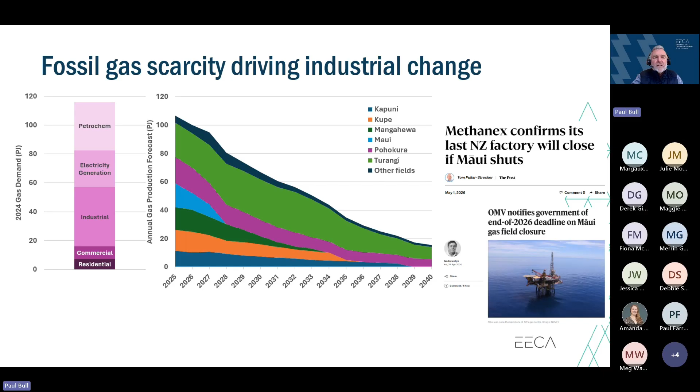What's driving that decline? This graph here represents the latest redetermination of gas, and so for the energy nerds amongst us, which maybe only myself and Paul today, or one or two others, the 2P reserves is the availability of the probability of gas coming out of the gas fields, and so 2P is that reserve which gives them the most comfort. And so you'll see significant decline over the years.

The orange is the Pohokura gas field, showing significant decline. Maui also on the decline. The redetermination says there's 738 petajoules of 2P reserve. Go back to the previous graph of 120 petajoules. So the more years we run at 120 petajoules means we're going to use that 738 up.

If we can get rid of that top portion, get to 60 petajoules, then 60 into the remaining does stretch it out. So if I crudely went, if you get rid of the 120-ish this year, left 60, that would mean you've got about 600 petajoules. So it's about 10 years supply.

A number of those will disappear, which is why that number looks at 20 petajoules being available in 2040. I could talk all day on gas, but I'm going to pass over to Meg to take us through the other challenges with energy.

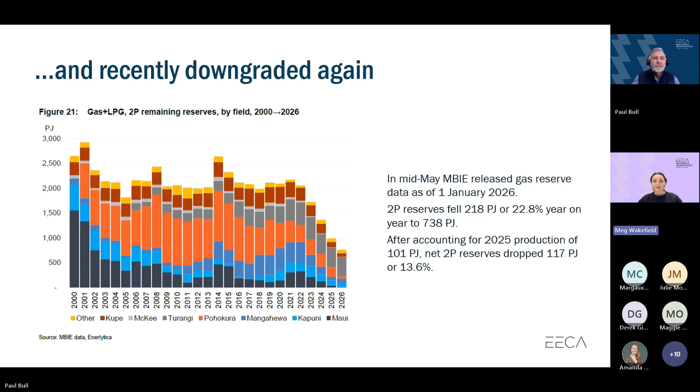Thanks, Paul, for running through what's happening with gas supply. There's definitely quite a lot of change happening in that space. There are also significant changes going on in the electricity sector at the same time.

Looking back to pre-1990, the paradigm then was a dispatch supply to meet demand approach. That was no longer the case for the last three decades. The network moved into more of an optimization approach. Obviously some new generation was built, but the focus was on optimizing and getting the most efficiency possible out of the existing infrastructure.

Looking forward to the era we're now in, post-2020, the paradigm has shifted again. We've entered an era of rapid and wide-reaching electrification of energy demand, and those previous two operating models just aren't suited to this. As a result, we're seeing another change in approach actively developing at the moment, basically flipping that pre-1990 narrative on its head. Rather than supply being dispatched to meet demand, we're now seeing a focus on dispatching demand to meet supply.

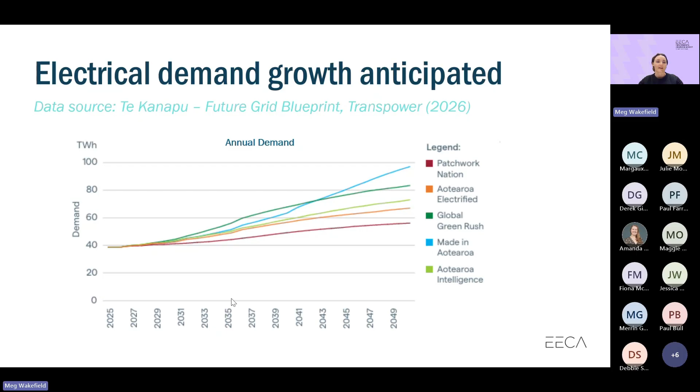Looking at the generation pipeline for New Zealand, there is quite a big upswing in expected generation deployment, and most of that is going to be in wind and solar. Along with that development of those wind and solar generation assets, it's expected that the marginal cost will be lower. However, renewables have lower capacity factors, which essentially means you still need some sort of cover in case they're not available when demand is there on the network.

That means fossil generation will still be required, but it's expected that it will mostly be required for dry year cover, as you will have heard about a lot in the media with everything going on with the LNG terminal.

With deployment of generation, of course, there are still risks. With more low-cost renewables, we do tend to see lower but also more variable wholesale pricing. If we end up in an excess of renewables, that might actually result in some projects being withdrawn from the construction pipeline.

Consenting holdups are always a thing as well, and there are always going to be construction bottlenecks and commissioning issues. Fast track consenting in particular doesn't necessarily always live up to its name. Any of these delays, whether in the deployment or decision-making phase, does tend to lead to cost increases, which will inevitably extend New Zealand's reliance on fossil generation.

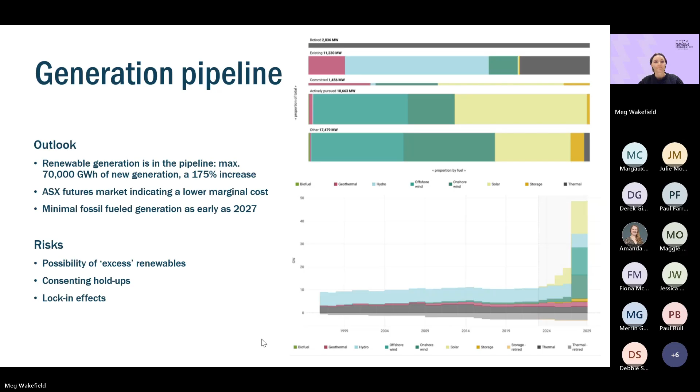Further generation can't fix the issue of peak demand, which is one of the other things that needs to be considered. Most of you will know that electricity demand is not stable throughout the day. There tends to be a couple of peak demand periods, one in the morning and one in the evening, and I've got an example of that coming up on the next slide.

The pipeline of renewable energy presents some challenges to the system because renewable energy is variable in nature, so electricity supply could become squeezed when those resources aren't available, as for example, cold weather sends peak demand higher. It's also expected that as overall demand for electricity increases, the peak demand across the country will increase. So New Zealand is actually looking at potential infrastructure capacity issues.

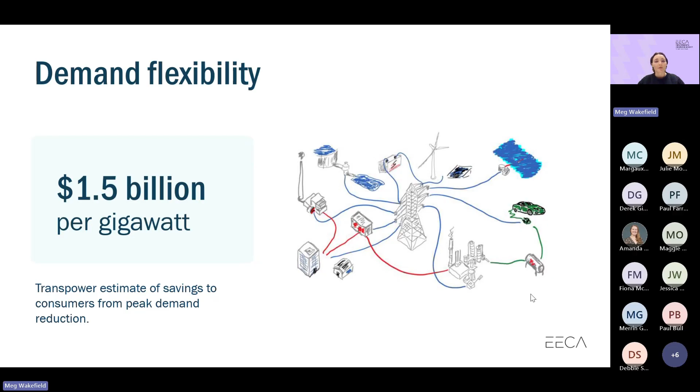So you're probably wondering what demand flexibility looks like in real-world terms—how do you actually deploy it? There's quite a few different ways, and I've just put a few of the examples up on this slide. We tend to refer to these as distributed energy resources.

One that's getting a lot of the spotlight at the moment, of course, is solar, and then also linking in with battery storage. Vehicle to grid is another option for deploying demand, I guess you could say, by using your vehicle as a mobile battery. And then thermal mass is another option for actually enabling demand response.

Some of you are probably familiar with the ripple control system used in domestic hot water cylinders, and you can see larger commercial and industrial versions of this. That lower middle image is of what is essentially an enormous hot water tank at a nursery site, and refrigeration and freezers can be used in the same way. You can build your thermal mass up while electricity is cheap and then just glide through those peak demand times.

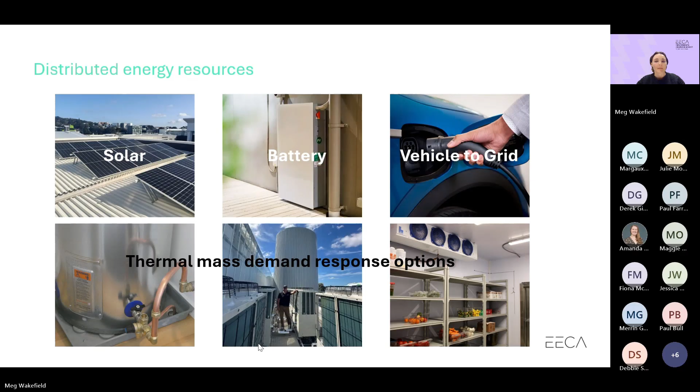And most of the suppliers these days now offer recycling options, and the panels themselves are a lot less energy intensive and have better efficiency than they did even just a decade ago.

So yes, it's definitely worth investigating if solar or other demand flexibility options would work for your operations. And it's especially worthwhile doing if you've a contract coming up or you're shopping around for a new electrical supplier.

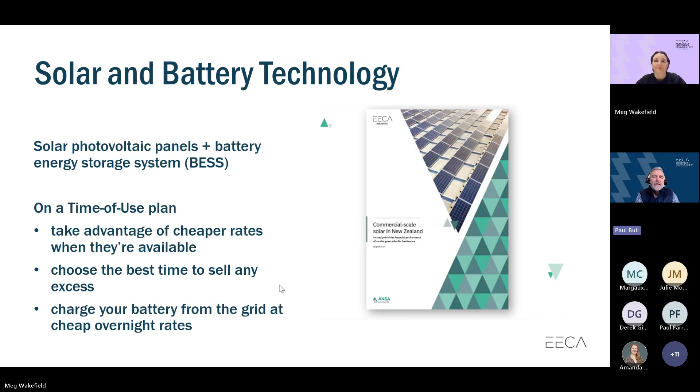And so that is a nice segue. If you're considering solar, you do need to look at your contract, because there are some, particularly time of use contracts, that do put a penalty in place if you're consuming off solar behind the meter - self-consuming any generation before any excess is put into the market.

So just a wee tip there - have a look at your contract, because one or two of the suppliers do penalise you for that. And I guess in balance, that's because they're offering a contract with a particular volume of electricity that they're provisioning for you from their generation portfolio.

Before I was at EECA, and I do sit on the All of Government Advisory Panel for procurement of electricity and natural gas, I worked for one of the major electricity generator retailers and sold a lot of gas, electricity and LPG contracts during my time there. So I understand the other side of the fence in terms of who's an attractive customer that gets a better price.

Meg talked a little bit about the two humps of a profile load. Those two peak times across the system tend to be the two most expensive times in the day, and time of year, winter - those peaks become even more expensive than those peaks would be in summer.

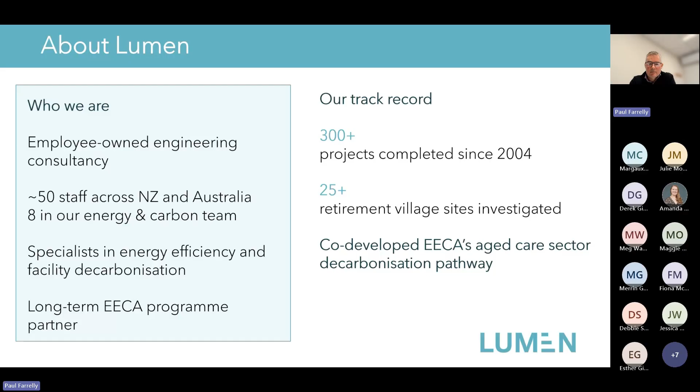Right, how do we help? There's a number of ways that we can assist, as my shameless sales pitch for a Friday morning. We do everything from energy audits. We've done a lot of fuel switching feasibility recently, looking at the business case for moving off gas or LPG. A lot of solar PV and battery storage feasibility more recently, deciding on the right size system and helping with procurement of solar as well.

My bread and butter, with my background of 9 years at Meridian prior to joining Lumen, is energy supply contracting and things. In my role at Meridian, I probably was on the receiving end of thousands of pricing opportunities, so I've got a good insight into how that works. If you want to talk to us, you can visit www.lumen.net, or you can contact me directly if you like.

So what we're going to talk about in this next section is really energy efficiency, and we're focused on the lower cost aspects of improving your energy performance, as opposed to the bigger ticket items that we'll cover a little bit later on around fuel switching. First things first, the fundamental place to start is to understand how you're charged for energy.

We've talked a little bit about time of use already in the webinar today. In my experience, most retirement villages will be on time of use metering. So what that means is you get different charges at different times of the day. Understanding what those charges look like, there'll be different rates in winter, different rates in summer, so it's important that you understand that. That's the energy charges piece of it.

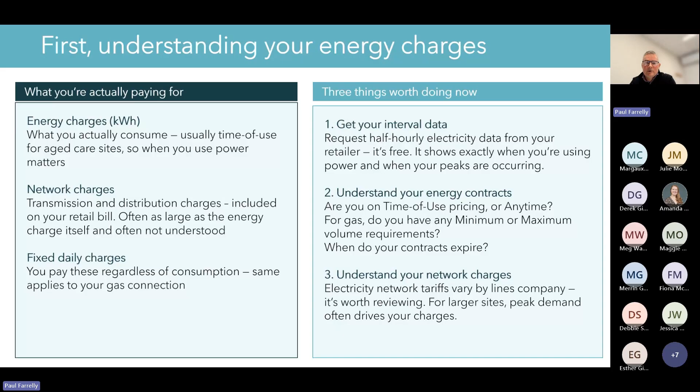So understand, get hold of some bills and have a look at what's going on there, and see if you can get that data from your retailer.

In terms of ongoing measuring and monitoring, best practice really, as we see it, involves 4 continuous steps. Firstly is to track and trend, so get that data.

And start plotting it. Because energy usage in this sector is pretty seasonal and driven by heating, you can't really compare one month to the next. You'll see a reduction of energy as you come out of winter into summer, and vice versa, an increase as you go from summer into winter. So you really need to trend it over a longer time.

There is a benchmarking tool on the EECA set of tools that you can download, where you put your data in and it gives some indication of how you go relative to others in the sector. It's pretty high level, and in reality every village is a little bit different, so I wouldn't read too much into it, but it might give you an idea of how you track at a high level.

Really, the benchmarking and targeting is against your own performance. Once you set some targets, it's all about action. Have a plan and then start implementing the opportunities you've identified, and track those as you go.

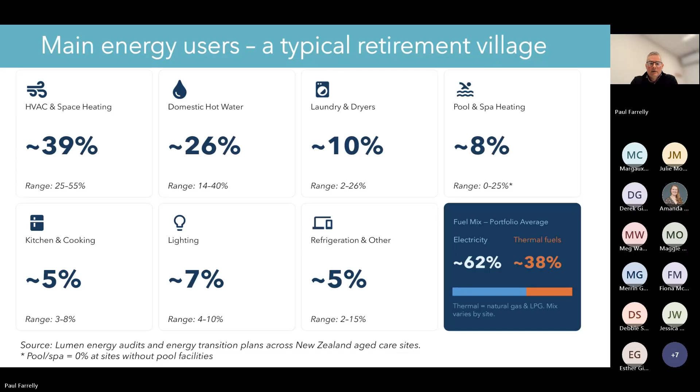If we then just look at fossil fuel, so LPG or natural gas, there's the odd site that has fossil fuel powered space heating, not too many, typically older villages, but almost always the main gas user in a village is domestic hot water. Then it'll be laundries and dryers if they're on site, followed by pool and spa heating - as I say, it might be a bit higher if it's a smallish site with a large pool - and then kitchens and cooking.

So the percentages I've highlighted are across total energy, but this is just to highlight what the main gas users are.

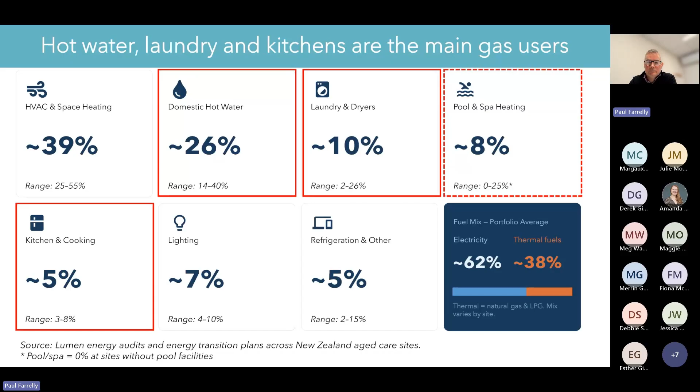So if we download our data from a retailer and plot it on a simple monthly view, what we've got here is a comparison of a typical South Island site and a typical Auckland site. These are villages where gas and LPG supply the hot water, kitchens, and a small laundry. These ones don't have pools.

It looks a bit similar when you look at it from afar, but if you drill into it a little bit, what we see is the South Island electricity usage is far more seasonal than Auckland's or the Upper North Island profile. So between February and July, South Island electricity usage can double to be 2.5 times more. Whereas in Auckland it's much more consistent, albeit there is still a winter peak, and you can see July is the highest month in Auckland.

Whereas the gas usage is a lot flatter across a year. So it's important to understand that seasonality. If you're comparing performance, you can't really compare July to December. You need to look at the previous year against the current year, month by month, to understand what your trend is.

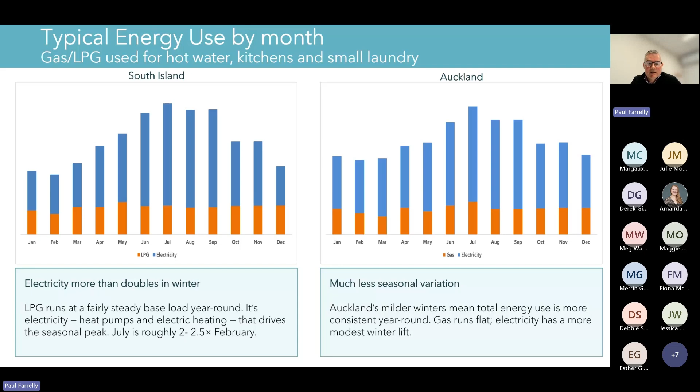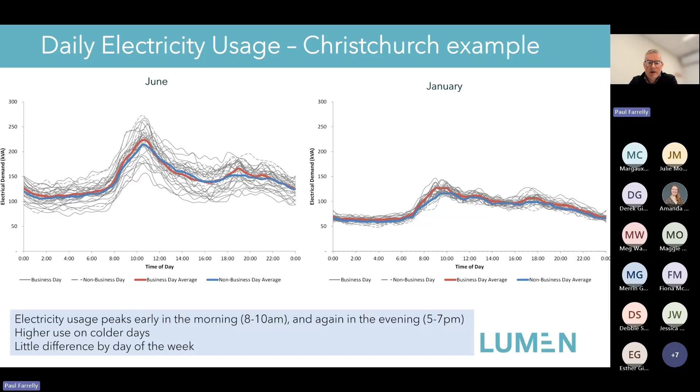Right, on to some practical tips for saving energy. I'm going to go through just the key areas of consumption. A lot of this is pretty basic stuff, so I'll go through it reasonably quickly.

So number one energy user in villages is heating and ventilation. Here's an interesting example: the heaters are on in the middle of the day, and the doors are open, and it's quite warm outside as well. This is the sort of thing we see on site all the time, where things are turned on in the morning and left on all day, even though the building temperature has reached the target or even exceeded it. So there's definitely stuff that can be done on site.

One thing we always recommend is making sure your systems aren't fighting one another. If one space is trying to heat and another is trying to cool, they're basically fighting each other and wasting a lot of energy. Using a dead band setting is a smart thing to do. Some obvious stuff: turn off radiators when outside temperatures are warm. You often see a cold morning where everything is cranking, then it continues heating during the day and the building gets too hot. So turning the heating down or off makes a lot of sense.

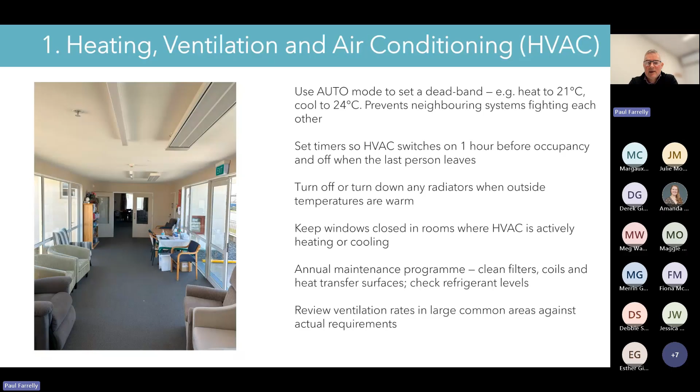Hot water is the second biggest user of energy. Basic stuff: maintenance — make sure anything leaking or dripping is fixed immediately. Check your hot water storage temperature is right. You don't want it too hot because you're wasting energy, but you have to manage Legionella risk, so there's a minimum temperature you have to store it at. Cleaning can also be a large user of hot water, so make sure your cleaning staff have good practices around its use and aren't overdoing it.

Low flow shower heads are a really smart thing to have. What we're looking for is a shower that runs at less than 8 litres a minute. There's a simple test: get a 2-litre jug and fill it — it should take longer than 15 seconds. If it's less than 15 seconds, you've got too much water coming out.

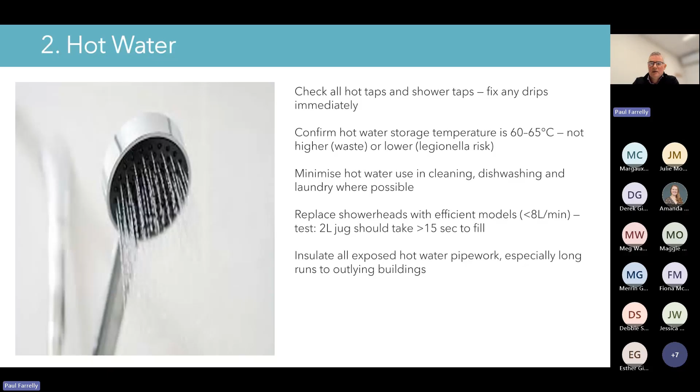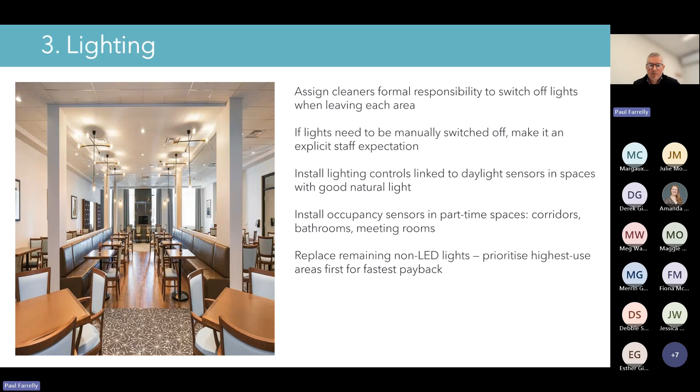Lighting was traditionally a bigger energy user at these sites, but as LEDs have largely been converted, the energy demand for lighting has come down. However, it's still significant. At the end of an evening, when cleaners are coming through, make sure someone is responsible for ensuring lights are switched off once the space is no longer occupied. If there are lights requiring manual switching off, someone needs to be responsible for that. Lighting controls are always a good idea, particularly linked to daylight sensors or occupancy sensors. And if you still have non-LED lights, prioritize converting the highest use areas first.

Swimming pools, if you have one, can be quite a large energy user. We say reduce pool operating hours where possible. Everyone wants to look after their residents, but if utilization is relatively low, you may want to reduce the hours it operates. I don't know how that will go down, but from an energy management point of view it's a sensible thing to do. If you've got a pool cover, you should definitely use it — it reduces evaporation, which is heat coming out of the pool and creating condensation or moisture in the air. So you need to heat the pool more and clear out that moist air and replace it with outside air. There's a double whammy there.

Look at optimizing your operating schedules and your pool pumps to match the actual usage pattern. Track when people actually come in and use the pool. And lastly, it's worth looking at whether or not you're over ventilating the space, and potentially look at heat recovery. There is a lot of heat exhaust air that's leaving due to ventilation requirements, so you may be able to capture that heat and reuse it.

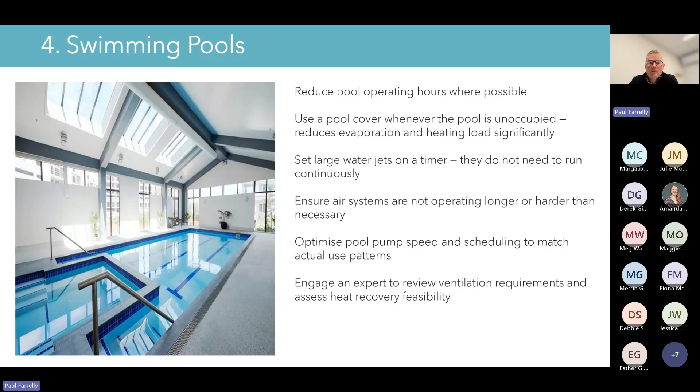Laundries, if you have laundries on site, it's pretty basic stuff. Run full loads only, make sure that the maintenance is up to date, and match the water levels with the requirements. We know there has been a bit of interest in putting ozone laundry systems in. They, in theory, are very energy efficient because you use less hot water, so on paper it sounds like a good thing. I'm not aware of too much wide-scale deployment of that in New Zealand, but I know overseas it's been utilised.

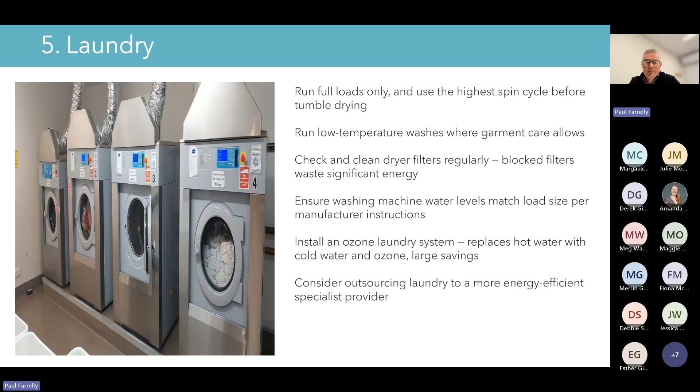The last one is you may want to consider outsourcing laundry to a specialist provider, particularly if you are looking to convert to electrical and you don't have electrical capacity available to run a laundry. That's something you might want to consider.

Onto kitchens. Probably the thing we see in kitchens a lot is everything running, all the elements on, gas, a lot of heat coming in the kitchen, because the kitchen staff want to be ready to go when someone rings up and orders an omelette or whatever. So we say try and only use the equipment when it's needed, but I know practically that may not always be practical. I think monitoring kitchen staff and having some sort of policies around that is probably a good idea.

There's a ventilation thing here as well. I often see extractor fans running overnight. They don't need to - they only need to operate when the kitchen's in action.

We also covered briefly fridges. I've been on site and seen big walk-in fridges where the doors open, I guess for ease of access back and forth from the kitchen. So just simple things like that, because you're creating greater cooling demand and then you're heating up the space in the kitchen. Yes, just obvious stuff.

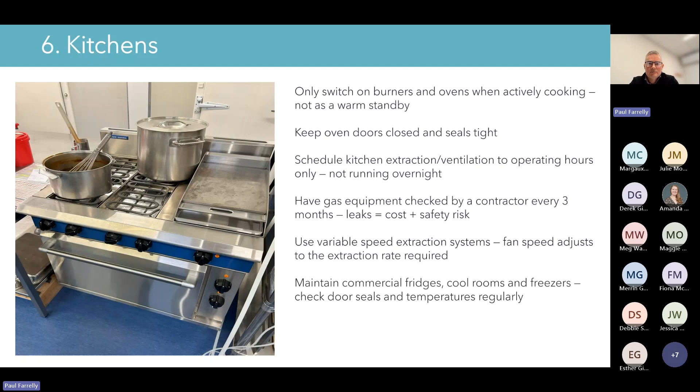Boilers is really about maintenance. A good maintenance regime for boilers is really important. Make sure that your heat transfer surfaces are cleaned. At end of life, boilers are pretty good, but they can create some maintenance issues - you don't want them to fail. What often happens is a boiler starts to fail and then a quick fix is required because there's been no planning done, and a gas asset gets replaced with another gas asset. So thinking ahead here is pretty important.

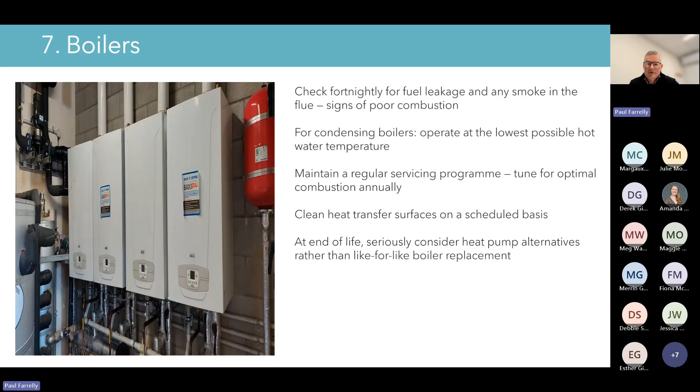Look at when your assets are coming up to end of life and seriously consider replacing with a heat pump.

Just quickly on insulation and glazing - if you've got exposed hot water pipes, make sure they're insulated. Insulation in ceilings, if it's not done, that's something that should be done on older sites if it hasn't already been done. Double glazing can be a smart thing to do as well. Obviously it limits heat loss in winter and heat gain in summer, particularly in northern parts of the country where you start to see a bit of cooling demand because of all the solar gain coming through the windows.

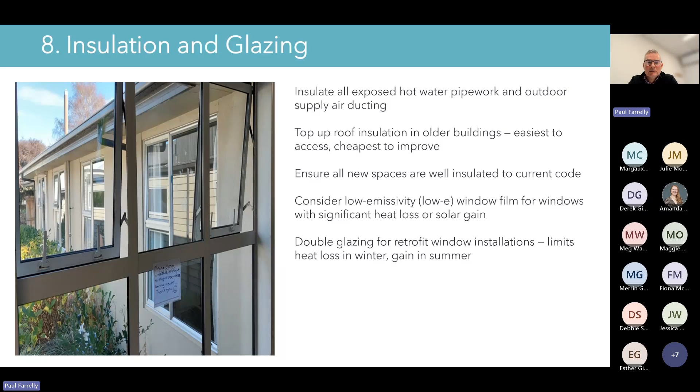And the last one, just appliances and equipment. I think we said that it's around about 5% across fridges and various appliances. So there's a few things here: make sure that when you are looking at replacing or upgrading equipment, you take into account the energy ratings, which you can find - this is managed by EECA, I believe.

Ensure that TVs, printers, computers, that sort of thing have automatic sleep functions on. With dishwashers, where possible, only run them when they're full, and it's the sort of thing you could schedule to run off peak as much as possible to reduce energy costs. You'll still be using the same amount of energy, but you'll be paying a lower rate for it if it's run off peak.

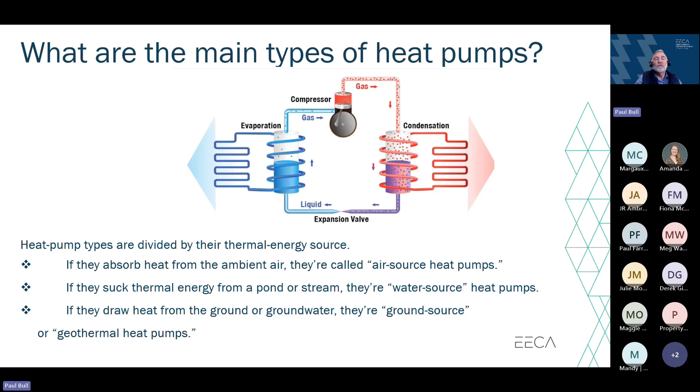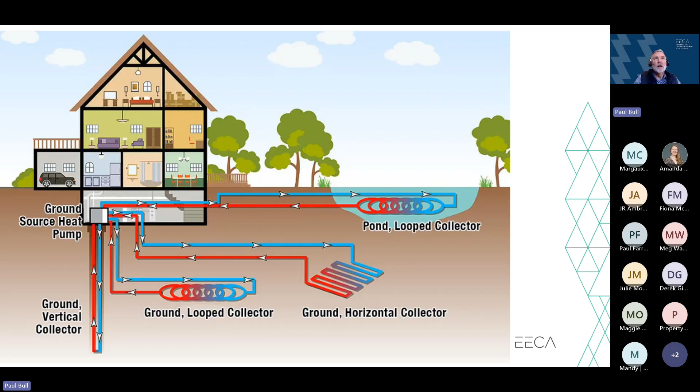There are different forms of heat pumps depending on other resources that you have available to you. Air-to-air or air-to-water are the most common heat pumps that most people can describe. Air-to-water is where you're using the outside air and then using it to heat up water rather than air. But there are a number of ground source heat pumps, either using lake or pond water, or the ground temperature, through a couple of different systems, whereby instead of being subject to the vagaries of seasonal air temperatures, you're using a consistent heat source such as a lake or the ground temperature in the case of a geothermal style heat pump. It just gives you a bit more consistency against the vagaries of outdoor air temperature.

Meg used this picture earlier on. I wanted to spend a little bit of time talking about Rainbow Park Nurseries in Auckland. They have a bank of air-sourced CO2 heat pumps using outside air temperature to heat hot water.

It is off-the-shelf heat pumps, not specially built. Yes, they are bigger than the unit you and I would have at home, but I'm looking out the window of the office here, level 7 on the terrace, and seeing a similar size unit sitting on a number of buildings across the CBD.

The thing that is interesting with Rainbow Park Nurseries is the big grey cylindrical thing in the background is water storage. They are using the heat pumps to generate 80-degree hot water that they're then reticulating around their nurseries, which could easily be being reticulated around your radiator system or your underfloor heating system inside your village complex.

The reason they have a big hot water storage tank is it enables them to avoid using their heat pumps in those expensive times of the day, both in terms of electricity and network connections. This project became very attractive in terms of financial payback for them, because they were able to use the cheapest times of energy on their electricity bills to generate their hot water, and then have the ability to use the hot water when they needed it as part of normal operation.

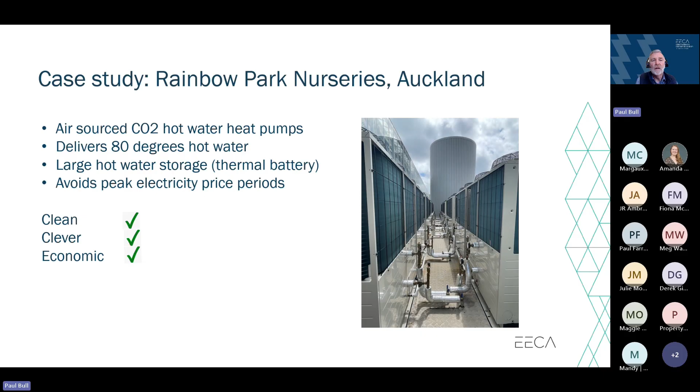So for the team inside the nursery, the stuff outside doesn't impact anything they do, but with good systems control, they're able to minimise the cost in operating the facility.

On this project, the heat pump is now the lead heating system for the hospital. They have retained the gas boiler as their N-1 security should something fail. My suspicion is in about 12 months' time, they'll decommission the gas boiler, remove the gas connection, and build the redundancy into the heat pumps that they have.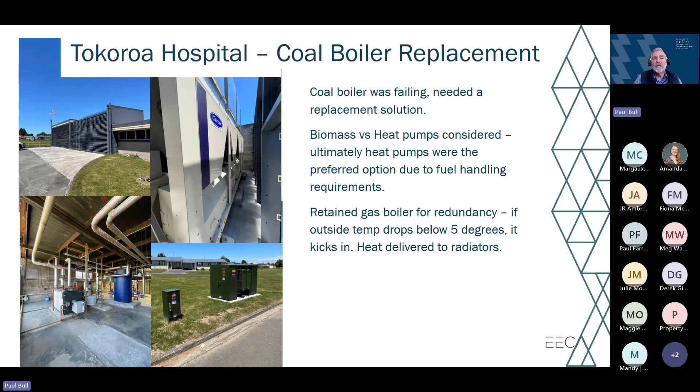Because they've got multiple units, if one fails, they still actually have enough there to keep the facility warm. There was a little bit of nervousness when the project first went in that on the coldest days the heat pumps wouldn't provide enough hot water, but that has not proved to be the case, which is one of the other reasons they did leave the boiler there in the background.

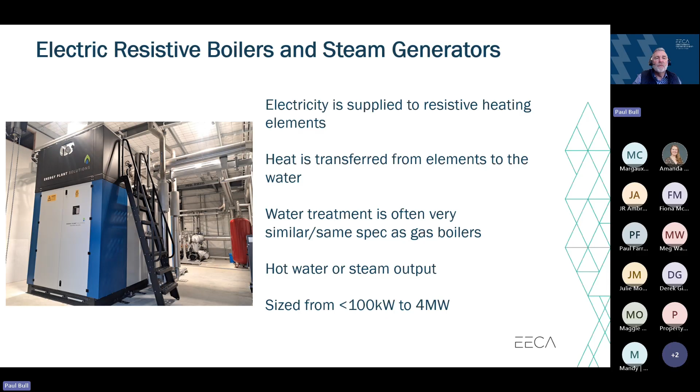The other options in the case of electric options are an electric resistive boiler and purpose steam generators, as two different pieces of equipment, as against having a gas boiler or a diesel boiler making hot water, in some cases steam, for those requirements. There are electric options - it doesn't have to be a heat pump. There is an electric boiler option that probably doesn't look too dissimilar to a gas boiler, as you can see by the picture there. It comes in various different sizes, flavours and colours.

Often it is taking low-grade logs or residues out of the forest and putting them through a small seasoning process, but then straight into the boiler.

Definitely not an option that you would consider across a retirement village, but wood chip might be, and is commonly used in parts of the South Island and parts of the North Island.

It does have a moisture content, and so the drier the fuel, the better it burns. The difference between wood chip and wood pellet is that wood pellet needs to be kept dry - its consistency and its moisture content affect the calorific value of energy that it delivers.

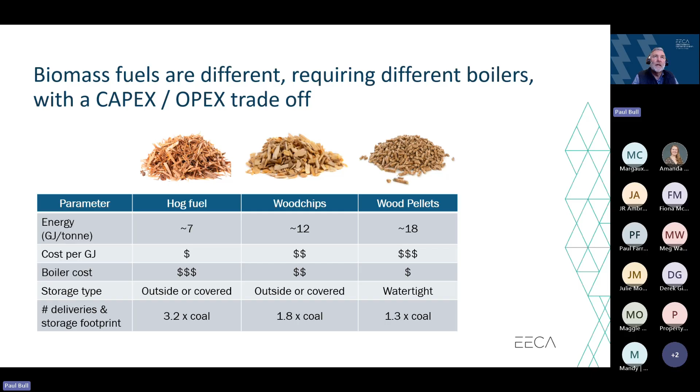Just wanted to share a case study of a wood pellet boiler - Summerset, building their new village in Auckland, St John's.

They clearly made a great decision not to put a natural gas boiler in, which would have been an easy option, as been done many times over the last several decades. But in wanting to reduce their CO2 emissions with a long-term reliable fuel, they elected to go with a wood pellet boiler.

It's a 6-storey building, so lots of complexities in terms of how to do it. Apricus, the supplier, did a great job of installing the system across a couple of levels.

And then out through the top of the boiler, out through the top of the building is the boiler flue. And so, yeah, it's a credible solution providing low emissions fuel and heat to the site.

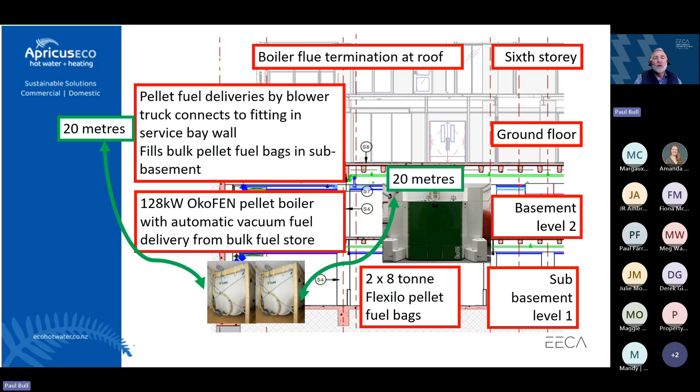We've seen similar boilers retrofitted across the Ministry of Education school estate, and in talking to Apricus and the other suppliers in this space that are doing this work, they often talk about what's the available space. So if you're taking a gas boiler out, they're pretty confident that they can find a way to ensure wood pellet boilers are able to go into that similar boiler room as the gas boiler or the diesel boiler was occupying.

EECA is supporting the challenges across the market with some co-funding support for North Island natural gas users and diesel users in a stationary energy sense.

Information is available on our website, and the products look fairly similar across both of those, where we've got a low-cost walkthrough assessment as a starting point, which EECA is 100% covering the cost of, through to those using slightly more energy with either a Type 3 energy audit or a feasibility study.

So an energy audit would look for energy efficiency, and being a Type 3 would then focus on the boiler and what the options look like to switch that out, whereas a feasibility study would just be a straight assessment up front of the various options to switch away from that fossil fuel using boiler.

Both of them definitely underline the need to right-size the boiler, ensuring energy efficiency is there first. We are likely to come out with a new product in the next 3 or 4 weeks, which is a low cost feasibility option for those with a lower energy spend. So watch this space. I think that was all I was going to talk to at this point.

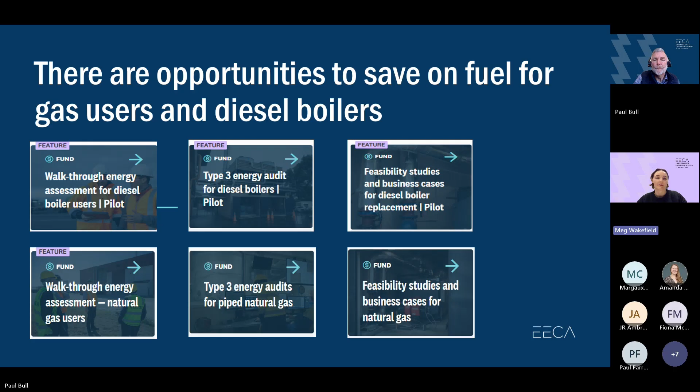Thank you, Margaux. Meg, we always seem to come back when we're deep in great conversation, just getting into the meaty stuff. Yeah, I know exactly how you feel.

Well, we luckily do have a bit of time for questions. So if there was anything further that people had questions on or wanted to continue a discussion from the breakout room, now's your chance. I have already pre-populated the Q&A with a question for Paul. Have you had a chance to look at that? I have, but before that, I was having a really interesting chat with Julie.

We've tended to focus on the operator's energy, not the individual resident's energy, i.e. independent living. It was a really good discussion around this particular site, which is a couple of hundred units. Most of them have some sort of gas or individual connections. There was discussion around how do we support the 200 individual users to transition off gas as well. I think that's something worth really thinking about, maybe even as a sector, because I don't know how many ILUs there are in New Zealand that have gas supply—there'll be thousands and thousands of them.

It sounds like in this particular instance, the distribution company is charging a gas termination fee which is prohibitively expensive. So it creates a disincentive to actually fuel switch, because you get stung with this huge charge once you disconnect from the network. If that's happening on a widespread basis, I wonder if there's maybe an advocacy play, because that didn't seem fair and reasonable to me, to have that termination charge.